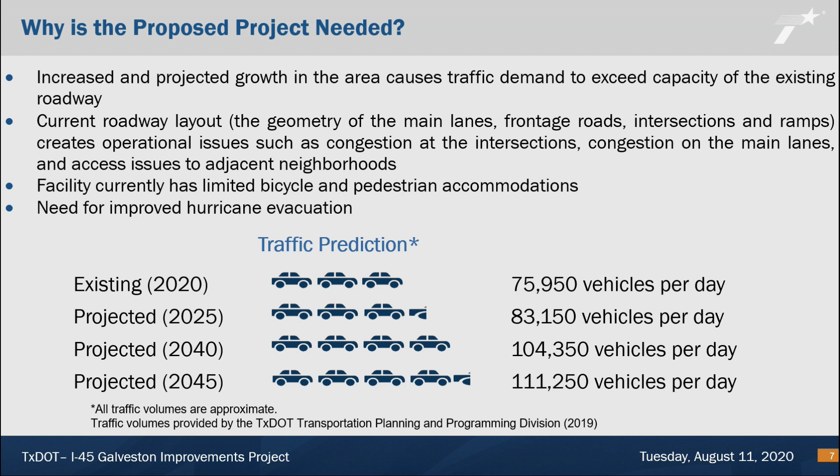The I-45 proposed improvements include reconstructing the main lanes to add one additional main lane in each direction for a total of 8 main lanes, 4 in each direction. Reconstructing the frontage roads to add frontage road lanes in select locations for an average of 2 11-foot wide travel lanes in each direction with auxiliary lanes.

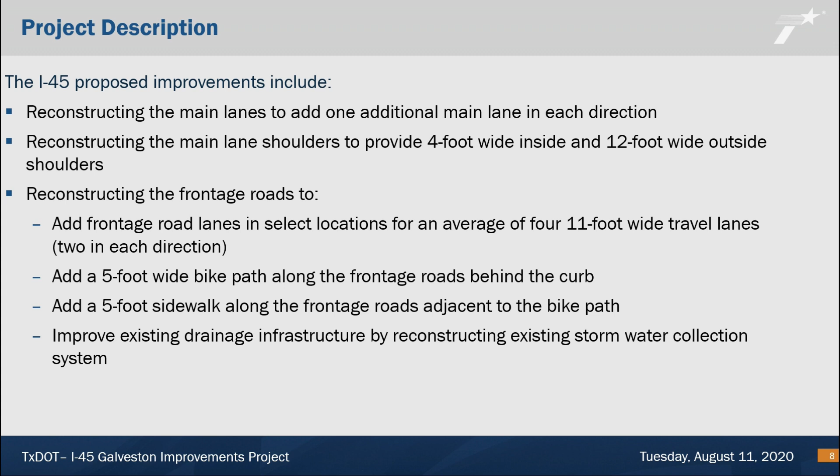Adding a 5-foot wide bike path along the frontage roads behind the curb. Adding a 5-foot sidewalk along the frontage roads adjacent to the bike path, and reconstructing the existing stormwater collection system.

The I-45 proposed improvements would also reconstruct the I-45 overpasses and add intersection improvements, including U-turn and turning lanes at the Harborside Drive, 71st Street, and 61st Street intersections, and construct a one-lane direct connector from northbound 61st Street to northbound I-45. The proposed improvements were designed to minimize impacts to natural or man-made resources, while still meeting project goals.

The schematic exhibits are located on the I-45 South Galveston meeting page on TxDOT.gov. Information on how to access the meeting page on TxDOT.gov will be provided at the end of the presentation.

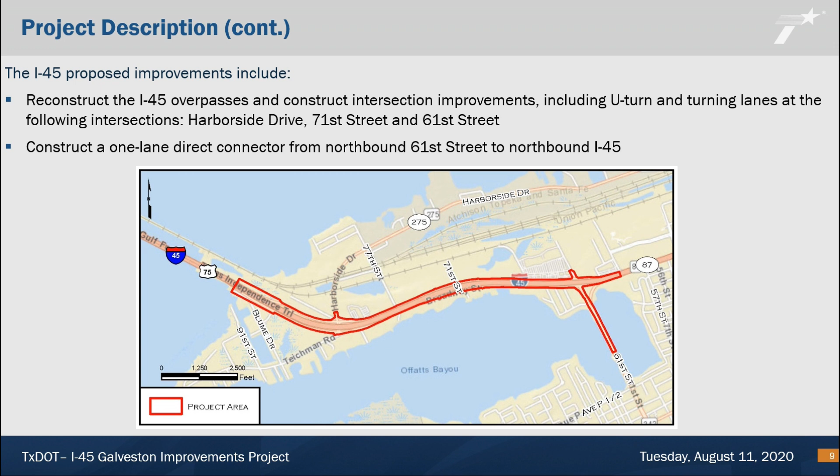Next, we will walk through the existing and proposed typical sections, how to read the schematics, and highlight 3 major areas of the schematics.

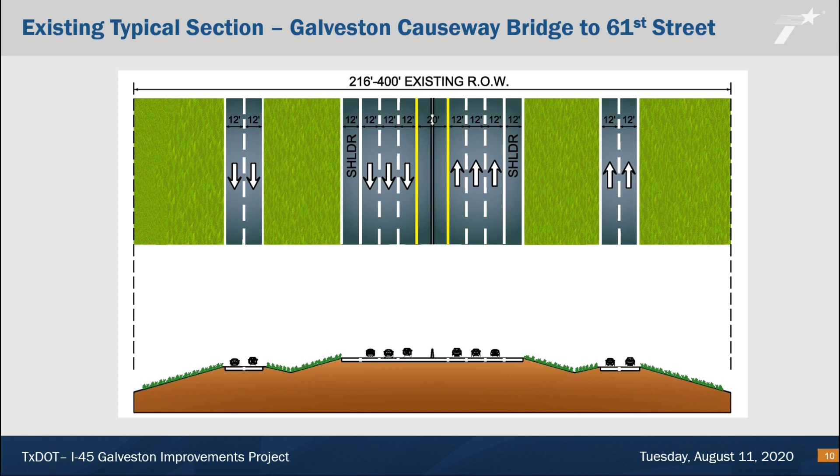The existing typical section, that is the existing roadway design, is a 6-lane freeway with 3 12-foot lanes in each direction, 10-foot inside shoulders, and 12-foot outside shoulders. The frontage road varies from 2 to 3 12-foot lanes in each direction with curb, gutter, and storm sewer. There are no pedestrian or bicycle facilities along this portion of I-45. The existing right-of-way ranges from 216 to 400 feet wide.

Two different typical sections are proposed for the project. The first proposed typical section is from the Galveston Causeway Bridge to 71st Street.

The proposed design in this section includes an 8-lane freeway with 4 12-foot lanes in each direction, 6-foot inside shoulders, and 12-foot outside shoulders. The frontage road varies from 2 to 3 11-foot lanes in each direction with curb, gutter, and storm sewer. A 5-foot bike path and a 5-foot sidewalk are proposed in each direction on the outside of the frontage roads. The proposed right-of-way for this section ranges from 250 to 415 feet wide.

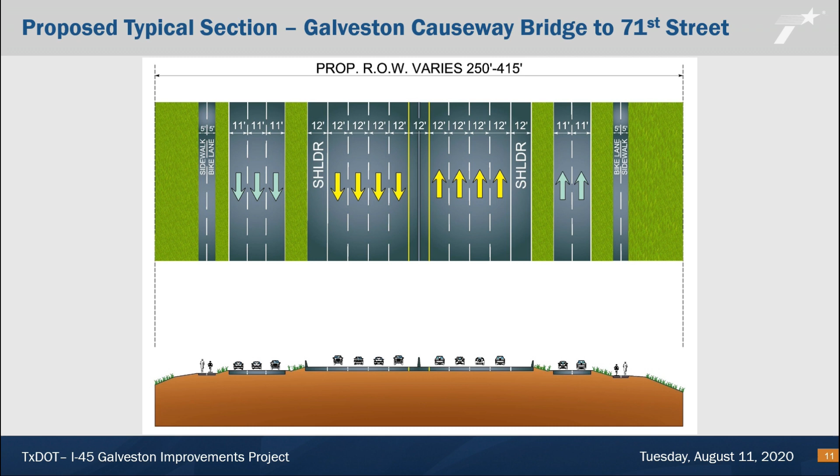The second proposed typical section is from 71st Street to 61st Street and includes a 6-lane freeway with 3 12-foot lanes in each direction, 6-foot inside shoulders, and 12-foot outside shoulders. The frontage road varies between 2 and 4 11-foot lanes with curb, gutter, and storm sewer, with a 5-foot bike path and a 5-foot sidewalk in each direction.

The proposed right-of-way in this section ranges from 250 feet to 300 feet wide. The main lanes are reduced from 8 lanes in the previous section to 6 lanes in this section.

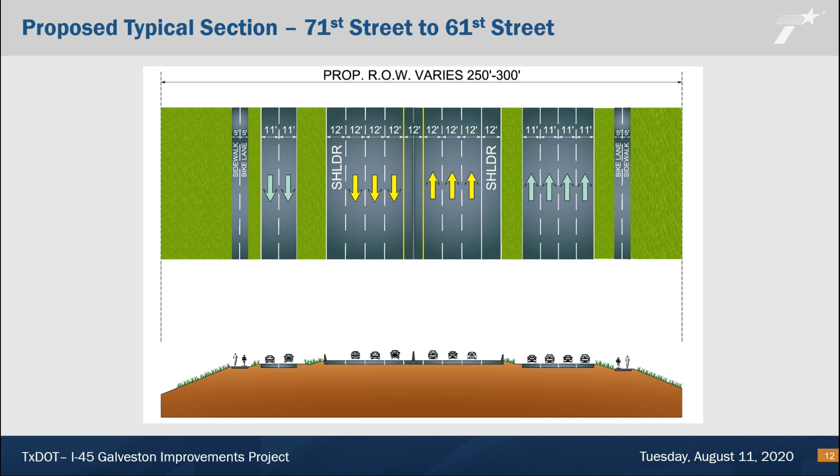Here is a screenshot of the legend for the schematics that you can find on the website. The legend is included on each page of the schematic so you can reference it during your review. The screenshot on the left shows the various types of lines that you will see.

Of particular note are the black lines that outline the main lanes, the blue lines that outline frontage roads, the thin black dashed lines that indicate existing right-of-way, and lastly, the thick black dashed lines that indicate proposed right-of-way.

The screenshot on the right shows the colors that fill the proposed design. These colors identify the limits and major aspects of the project. Let's walk through them. The yellow color identifies the main travel lanes on I-45.

The frontage roads are identified in light gray. In between the main lanes and frontage road lanes will be areas of blue, which are the entrance and exit ramps. Lastly, areas in dark orange color identify bridges, and small areas of dark gray are raised medians.

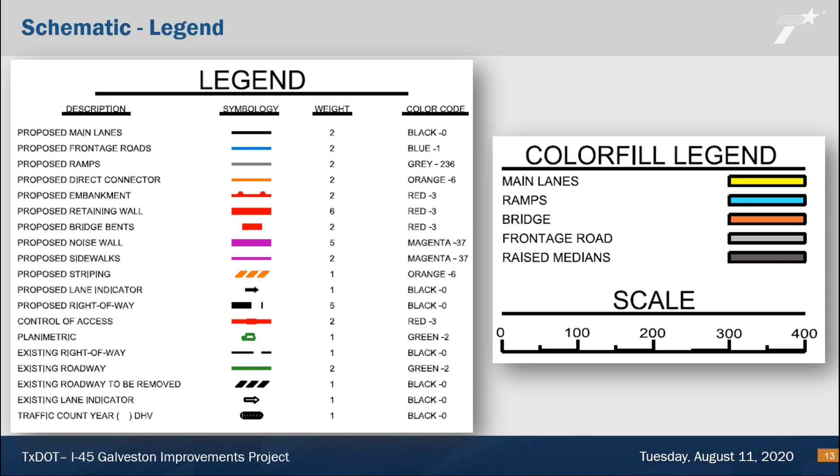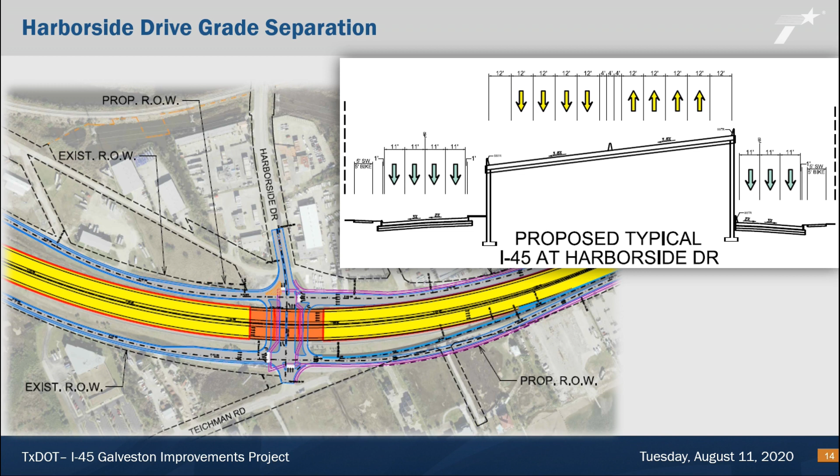Just like at Harborside Drive, each of the major intersections in this project were evaluated during the early stages of this project to help determine how many lanes were needed. Detailed traffic signal timing would be completed during final design.

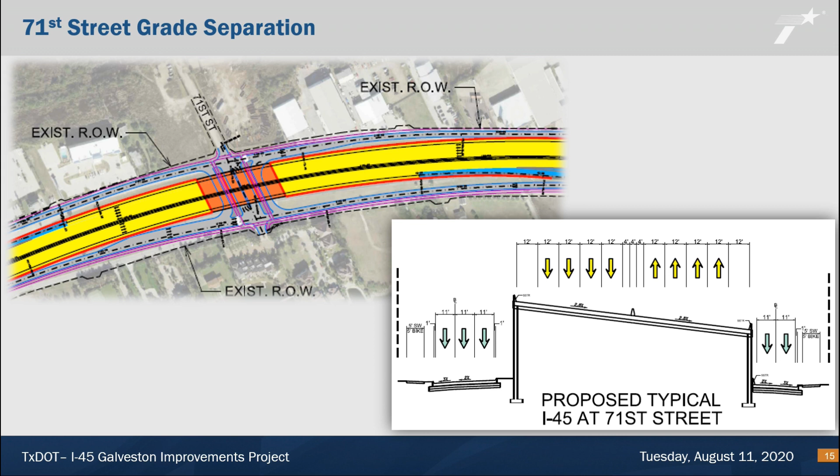This is called a direct connector. Vehicles would travel on an elevated lane over 61st Street and the frontage road straight onto I-45 northbound. This would allow vehicles to access I-45 northbound without stopping. This lane would also facilitate emergency evacuations.

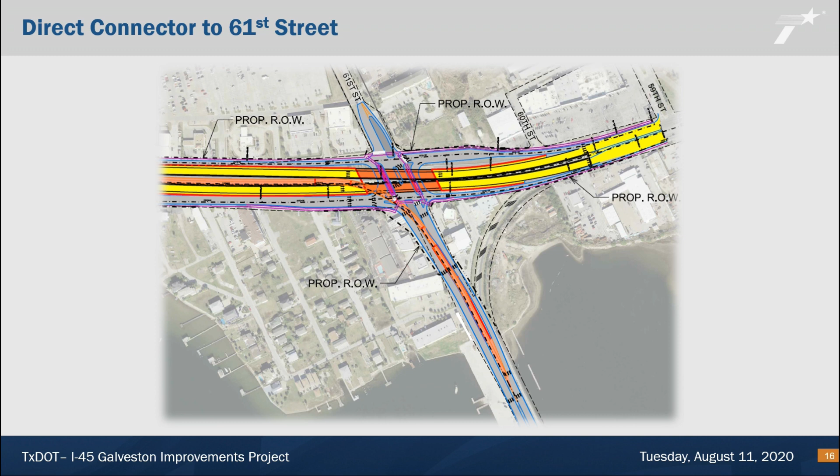Due to the high number of crashes occurring at this merge point with Broadway, we propose to eliminate the bypass and add a right turn lane at the intersection. Although the project proposes to add a direct connector off of 61st Street and remove the right turn bypass, the total number of lanes on 61st Street would not be reduced. These changes are proposed to improve the safety and operations of this intersection.

TxDOT has been working with the City of Galveston and adjacent property owners to determine how best to fit bicycle and pedestrian facilities through the already developed area of 61st Street while minimizing impacts. The location of bicycle and pedestrian routes in the 61st Street area remain tentative.

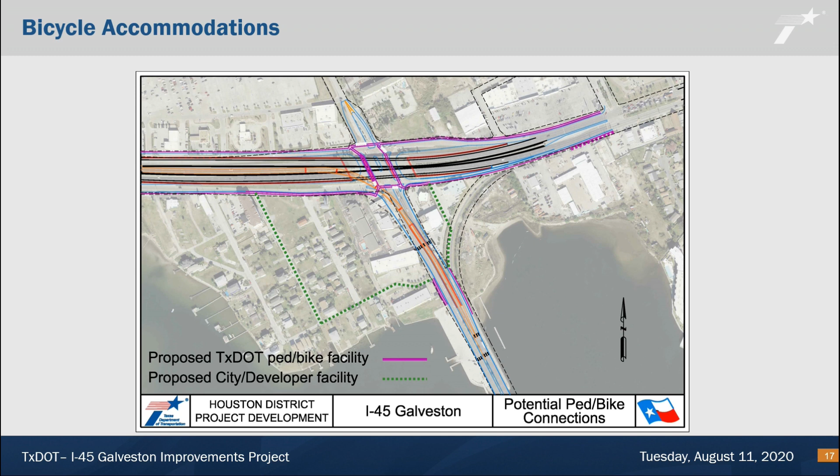The project team is in the process of identifying and evaluating potential environmental impacts of the proposed project. Areas being reviewed include community impacts, cultural resources, biological resources including threatened and endangered species, water resources, hazardous materials, and traffic noise. The traffic noise analysis will be conducted in accordance with state and federal guidelines to determine if the project would result in traffic noise impacts.

If there is a traffic noise impact, noise barriers would be analyzed to determine if they are reasonable and feasible. If noise barriers are proposed for the project, a noise workshop would be held for property owners adjacent to any proposed noise barriers.

Approximately 2.8 acres of additional right-of-way would be required for the proposed project, and it would potentially displace 3 commercial structures. No residential displacements are anticipated.

TxDOT offers relocation counseling and financial assistance to residences and businesses that are displaced by the acquisition of right-of-way in accordance with the Uniform Relocation Assistance and Real Property Acquisition Policies Act of 1970. TxDOT would provide assistance to potentially displaced businesses to aid in their satisfactory relocation with minimum delay.

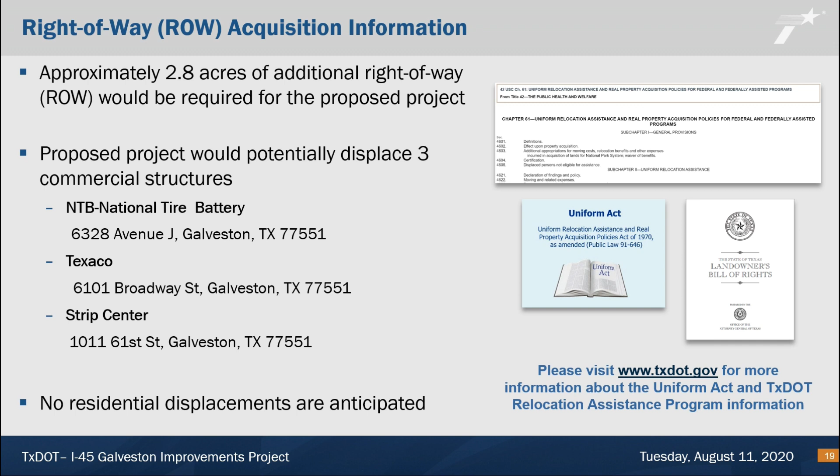Information about the TxDOT Relocation Assistance Program concerning services and benefits for displaced persons and businesses can be found on the TxDOT website at https://www.txdot.gov/government/processes-procedures/row.html. For questions regarding the right-of-way acquisition process, please contact Nena Calvin at 713-802-5696 or at nina.calvin@TxDOT.gov.

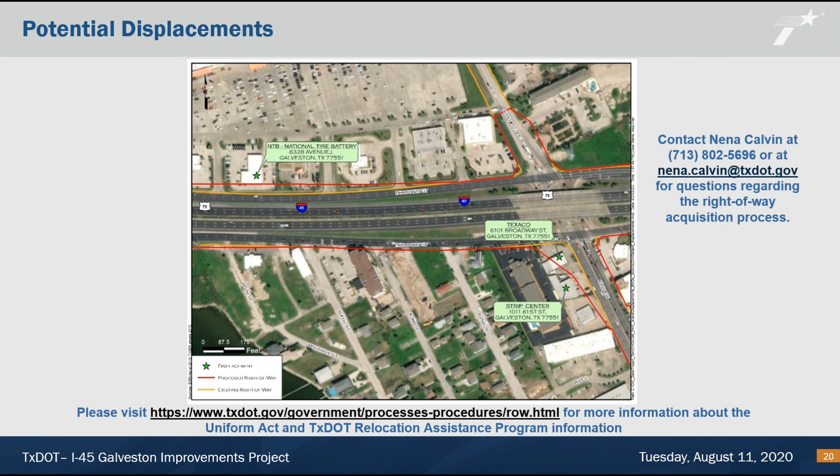When the environmental studies and documentation are complete, they will be evaluated and an environmental clearance decision will be made. Provided the environmental process is approved, the project would move into detailed design and right-of-way acquisition in the winter of 2020 to 2021. If the project is environmentally cleared, construction is programmed to begin in 2022. Construction is anticipated to be complete in 3 to 4 years.